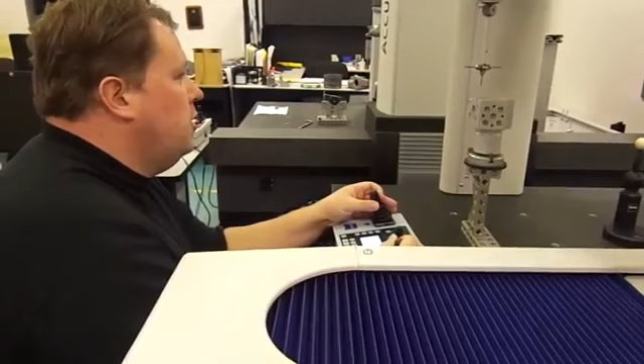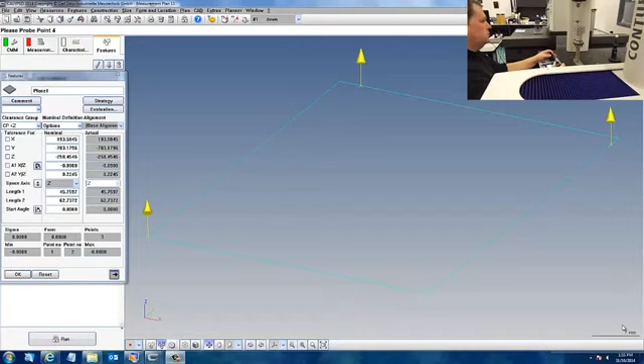I'm going to start with some alignment features here, and this is our normal training block that we use for all of our training classes. And as you see on the Calypso screen, it's starting to guess the geometry type that I'm inspecting. Now the nominal values that you see here, those are relative to the machine zero. They're not important for us to worry about yet. Once we make it to the alignment, that's when we really have to start thinking about what's going on.

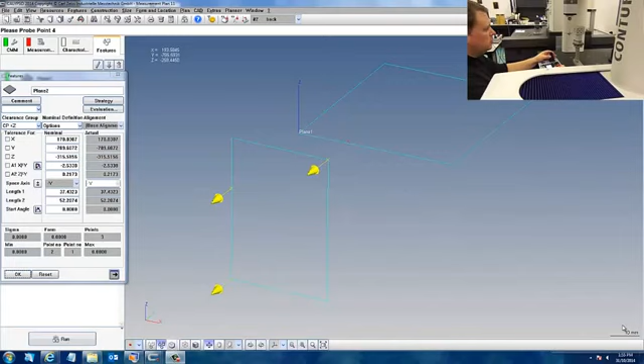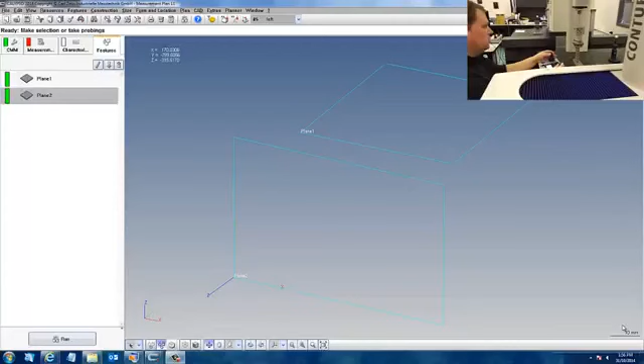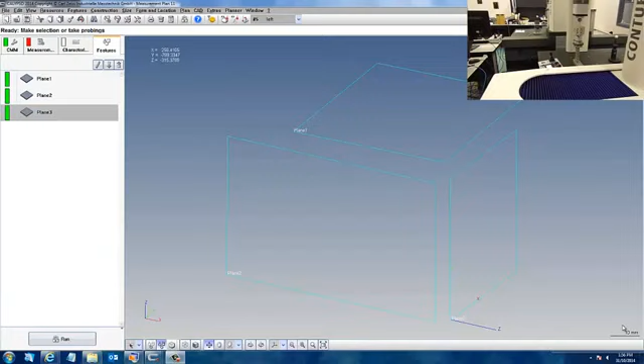Remember the trick of you can change your probe stylus directly from your hand box, so you don't have to go back to your computer screen all the time. That'll do for our alignment. Let's prepare the alignment right now and take a first look at our nominal values. Create a base alignment system. So here's our top face, side face, and our other side face.

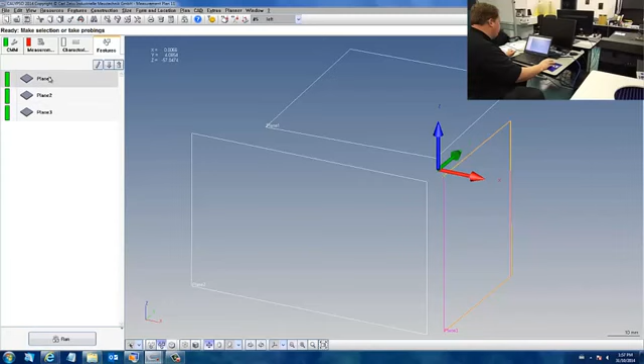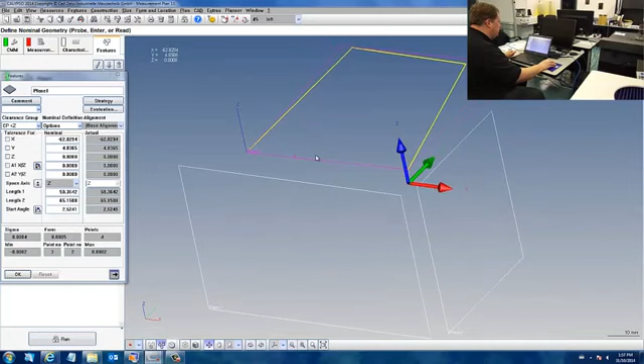Now if we take a look at our features, we saw plane 1 earlier was relative to the machine zero. But now you can see the values have changed. The X value and the Y value here actually show us the corner of the plane. And this corner that you see here is illustrated by the small trihedron. There's no need to change the X and the Y value of this plane. This simply is a representation of where I measured the plane during my manual inspection phase. What's important here is the Z nominal is now 0 because that's where we place the origin, and our A1 and A2 angles are also 0 relative to the Z axes.

If I take a look at plane number 2, there are some things that are definitely of concern. This face is meant to be the Y0, the Y origin. But as you see here, the value is actually just a little over 10 microns. Naturally, this is supposed to be 0. So let's edit that. But why wasn't it 0? Why did it have a value that was incorrect? That's because this face is not perfectly square to plane number 1. So this was the average value of our plane rather than the desired value. Part of this is caused by the angle that we see here. These angles are measured in decimal degrees. They should also both be 0 because our feature is meant to be perpendicular to the top face and it's pointing in the -Y direction.

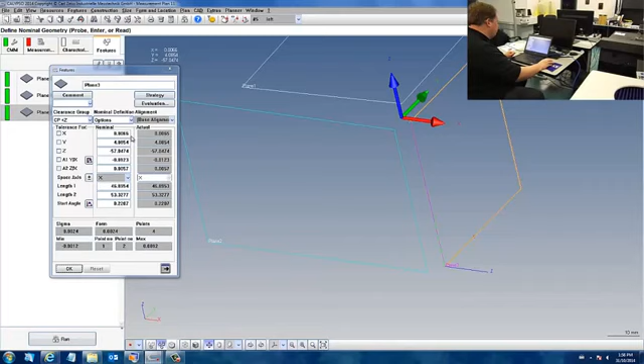On our third datum face here, we can see it's a similar issue. The X value here is supposed to be 0, but it's not. And our A1 and A2 angles are both slightly different. Okay.

What's the benefit of changing these values, though? Well, the first key item for us is that Calypso now can target exactly the right place. When it's driving the probe to these faces, it now has the exact perfect vector to approach the face on. Furthermore, when we're doing things like constructions, it will use those nominal values to influence the nominal values for our constructed items. And the third, and I feel one of the most important things, is that when we're creating characteristics, it's going to be able to use the correct references, and that means less editing of characteristics for us later. A little bit of work on the features can save us a lot of work on the reporting. Let's measure a few other items on the part right now so we can see how they will be affected from different special circumstances.

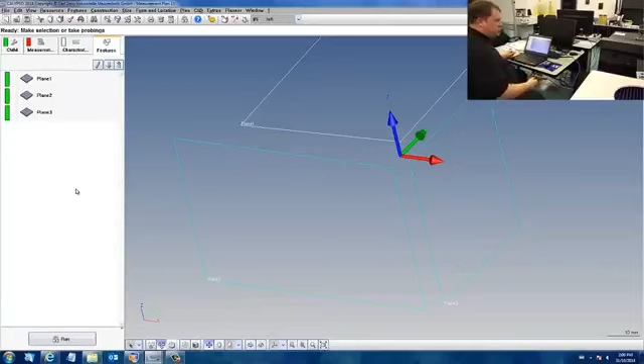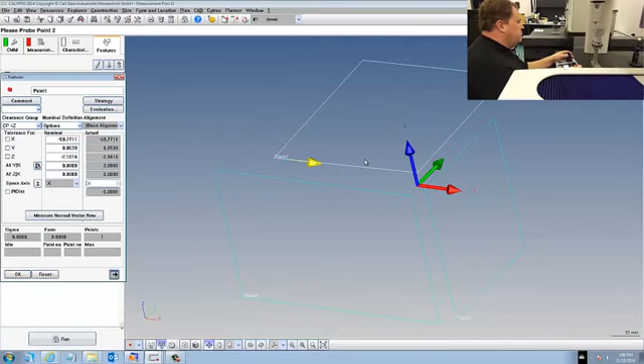Everyone measures a circle every now and again. Circles are a special instance in correcting your nominal values. There's something different about circles that makes them unique. If we open up with the circle that we've just created, we have our nominal XYZ locations, our nominal diameter. I happen to know, for instance, that the diameter here is exactly 12.1. The X and Y values and the Z value should be corrected according to your drawing.

But that's not what I wanted to talk about on a circle. The key item for the circle is the A1 and the A2 value. Notice that they are exactly 0. They didn't require any corrections at all. This is because a circle is a 2D element and will automatically snap itself to the closest available space axes. This is important to note because it does mean less editing for a circle.

But if you are inspecting a diameter and you're concerned about it being crooked or tapered, a circle is going to snap directly to the axes and you might miss important information. That's why when I'm checking a bore, whenever possible, I measure a cylinder. Let's measure the same feature as a cylinder.

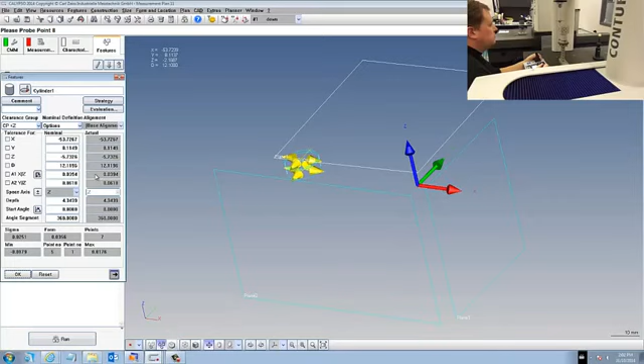There. This is the exact same geometry but measured as a cylinder. What we'll see here, of course, is the diameter. Well, we can fix that. The difference between the circle and the cylinder's diameter was very, very small. But what's really important here is this. Our cylinder is not square to the top face. It's supposed to be, and therefore we'll change the values here both to 0.

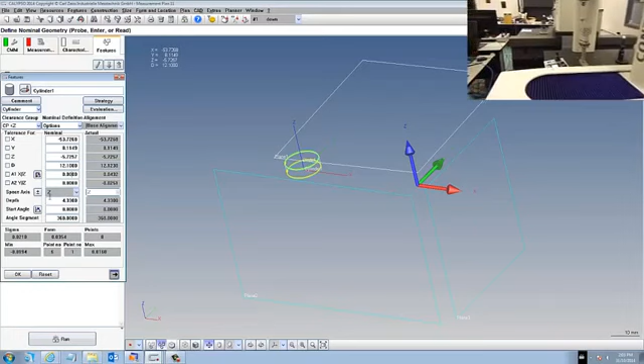But the fact is that it is literally not perpendicular to our datum plane. When we're calculating things like position, it requires that we check at the top and the bottom of the cylinder in order to determine things like the angle relative to the top face. If you measure a circle, you're missing this information. It doesn't seem like a lot, but on a longer bore, this could have an influence on whether or not your part will assemble when calculating position.

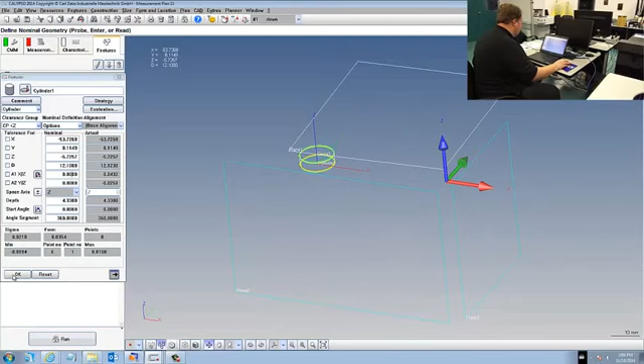That's why it's important to not only measure a cylinder most of the time, but to make sure that these A1 and A2 values are nominally 0 when on a plane like this. It will make your calculation of true positions much easier. Now I'm going to measure a plane on an angle.

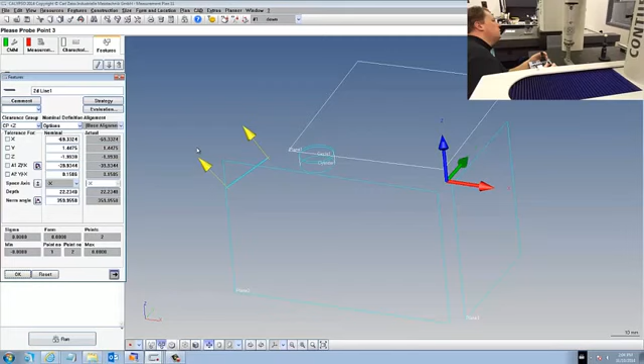In this particular case, the key item that we're correcting is the A1 and A2 angle, except this time these values are not 0. In some other software, these angles would be calculated with an IJK value. Then you would have to do a whole bunch of trigonometry to figure out exactly what to put here. Calypso makes this easy. This is a 30-degree face. Not quite 30 degrees actually, but it's supposed to be.

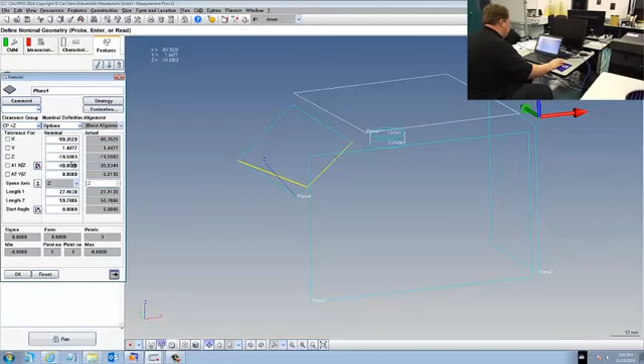You simply change this angle to 40 and the other angle to 0. This is because towards the y-axis, towards the front and back of the part, there's no tilt at all. Now when I'm calculating things like the angle between these surfaces, the nominal will be absolutely correct. This is the first habit that you should be learning when you are creating your very own Calypso programs. It's a simple and easy step that will result in better measurements and an easier time editing your programs.